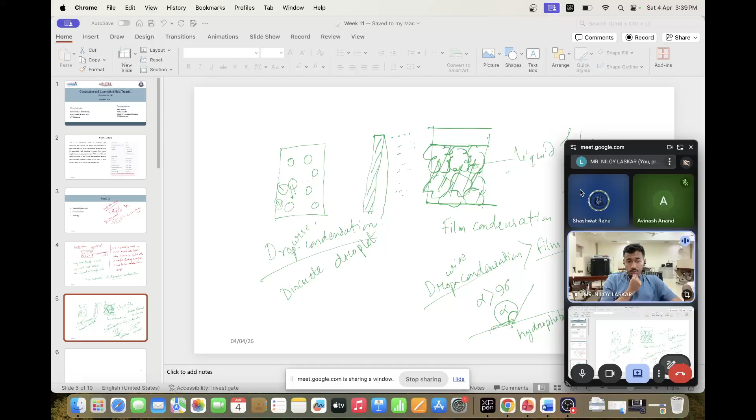So any confusion up to this? Do you understand this concept of condensation? There are two types.

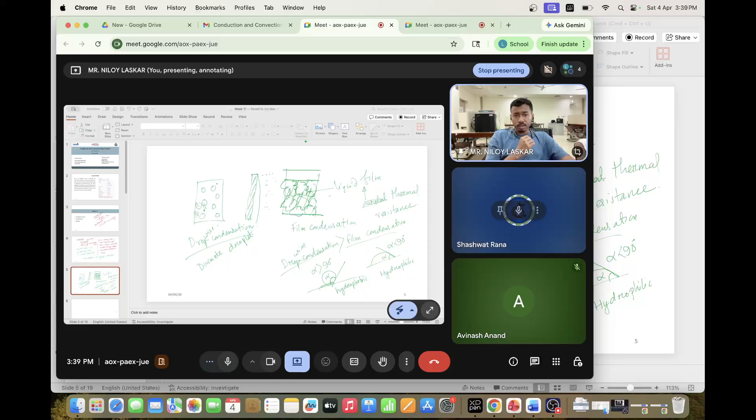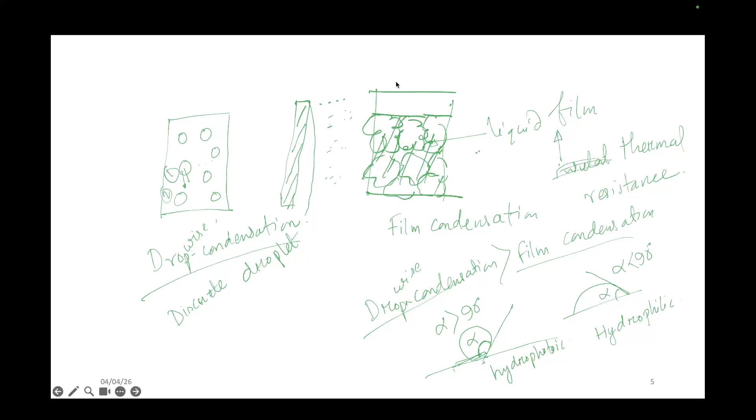If both temperatures are same, generally... let me move to this slide. If this is the rod or plate, and its temperature is 100 degree, and the temperature of the vapor is also 100 degree, then what will happen? If the vapor particles are both at 100 degree, then it is in equilibrium.

If the vapor particle is somehow at 100.1 degree, then condensation will happen. If they are the same temperature, they are in equilibrium. In practice, it is not like that if it is 99 degree then condensation is happening - at least 2 to 3 degree difference is required for most surfaces.

If I talk about boiling, when will it happen? If the surface temperature is more than 100 degree - that means if the liquid temperature is 100 degree and surface temperature is 100.1, boiling will happen. Fundamentally, this is correct, right?

Yes, we also know this. But in practice or real life, it is seen that boiling only starts if the surface temperature is around 3 or 4 degree more than the liquid temperature. Like for water, if the surface temperature is more than 103, then boiling happens.

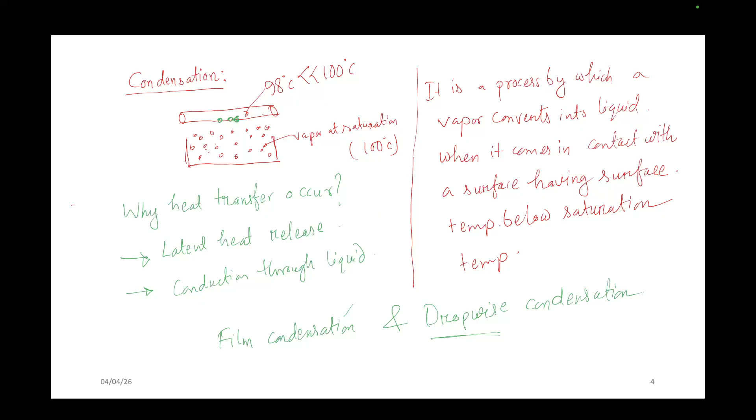Condensation, yes, yes. This concept is for condensation as well as boiling, both apply here. Now let me show you a small portion of the derivation which is necessary for your exam point of view, that's why I'm showing this.

Among these two condensation modes, one is film condensation, another is dropwise condensation. Among these, which one gives the highest mode of heat transfer? Because in dropwise condensation, the surface is more exposed to the vapor particles, right?

Say this is a plate. Initially, if the vapor is formed and there are vapor particles, this vapor gas comes in contact with this point, this point, this point - I am talking about only film condensation. This droplet, all these droplets combinedly form a liquid film. What will happen? There is also a gravity effect, so after a certain time, it will form the liquid layer or liquid film.

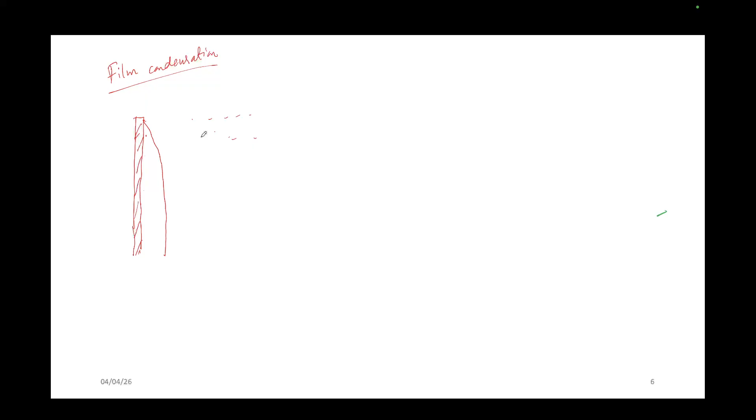So here the temperature of the vapor, say TV, should be constant, right? Any confusion?

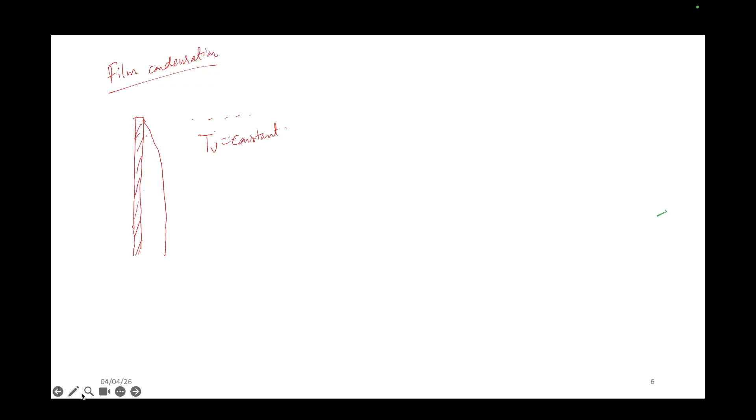Using another color - say this is your y-axis, represented in this direction, and this is your x-axis. So if I consider this plate of length L, characteristic length L, right?

And for a certain reason, this is your thickness of the - what is this? Thickness of liquid layer or thickness of liquid film. So this is a fully liquid region.

As the liquid is moving because of gravity, its velocity should be very less. But as the liquid is moving, there should be a hydrodynamic boundary layer, right or wrong? So the hydrodynamic boundary layer should be this type, whatever you have studied - it should be the same. The thermal boundary layer concept also develops here along with the hydrodynamic one.

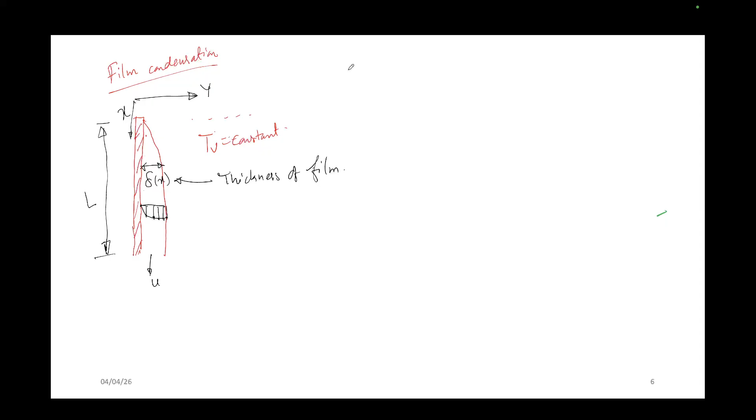And for the momentum equation, what is there? Velocity is there, velocity and pressure term. So to find out the velocity, what type of equation do we need to use? We need to use the momentum equation or Navier-Stokes equation. You can say both. So if I apply this NS equation, Navier-Stokes equation, let me write it in short form. This is rho

capital D u, sorry, capital D means total derivative. I think you forgot this thing. Let me give you a recap. Du dt means, now I think you recall this thing. So this is minus dp dx, it is only for the x direction I am talking about, plus mu.

So see here, this change in velocity in the t direction, this term, what is this? This is the total acceleration term. Already we know that there is no such term which changes, this will be 0, right?

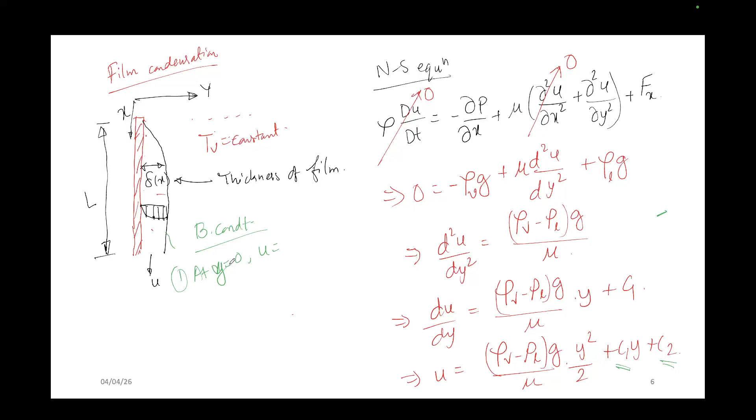No, u equal to, first at y equal to 0, not x, at y equal to 0. At y equal to 0, what is the value of u? Y equal to 0 means it is at the wall, and in the wall what is there?

No slip condition means u should be 0. So if you put that here, what will you get? This one is 0, this one is 0.

So C2 implies... C2 is 0, since u is 0.

Next boundary condition is at y equal to delta, which means the highest maximum thickness of the film. So what should be the condition at that case? The velocity gradient should be 0, since the maximum thickness is at this point.

What is the value here from the hydrodynamic boundary? We know that initially there are changes with respect to y, but after reaching the stable condition, there is no velocity gradient. So we need to put it here, right?

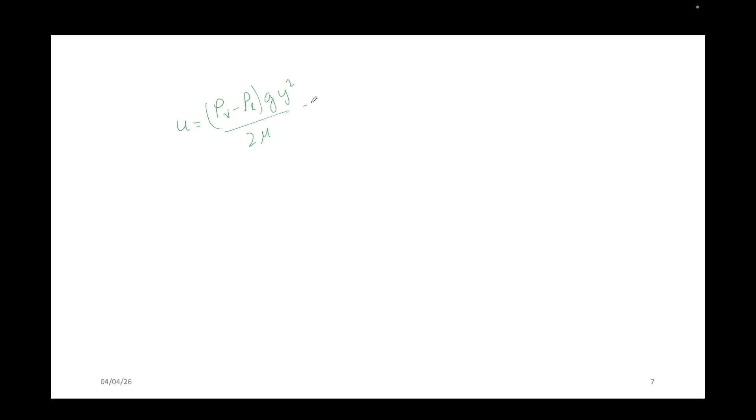This divided by mu, delta, and Y is there also, right? So if I take some constant here, to mu G Y, I can take, so what I'll get there is Y minus 2 delta, right or wrong?

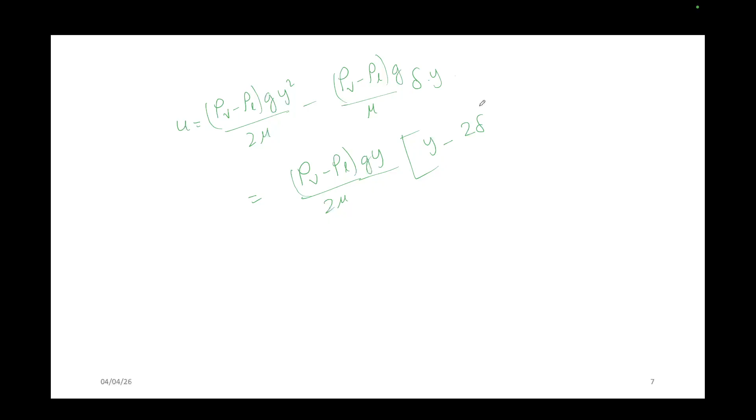So you got it, okay. Now I just want to show you one thing. If I have to find out this heat transfer or mass flow rate, say I'm taking a small area here, this is your del X. This region I'm talking about, this area. So I am drawing this thing here also. This is the small area, this is del X, this is at a here from X at this region.

So if the inlet mass flow rate is, I am using this mass conservation equation. This is the mass flow rate flowing at this, if this is a control volume. In the control volume, this mass flow rate is entering, and what is the mass flow rate here? This should be at x plus del x, right?

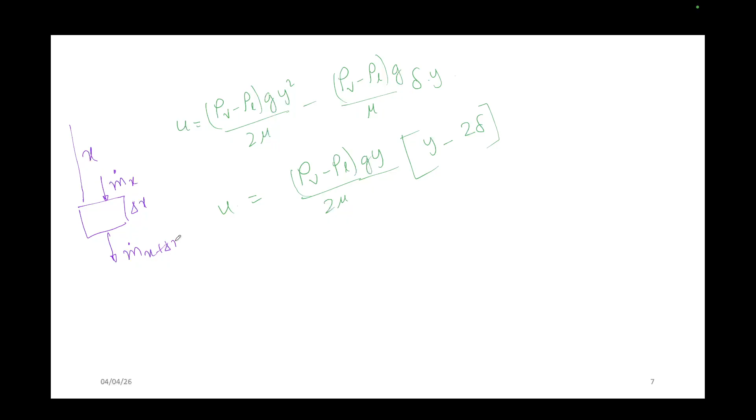And in the control volume, something may be accumulated, so I just write it as m dot c. What is m dot c? It is the energy occupied because of this condensation phenomena. Like a vapor particle once coming in contact with the cold surface, it gets converted into liquid. So there is a latent phase change, there is latent heat transfer, right? So this m dot c basically is the heat absorbed by this liquid film.

So what I can write from this, from the mass conservation equation: whatever outgoing minus incoming should be equal to, can I write? So now in the first derivative form, this thing can be written as plus d/dx of this, right? Yes or no?

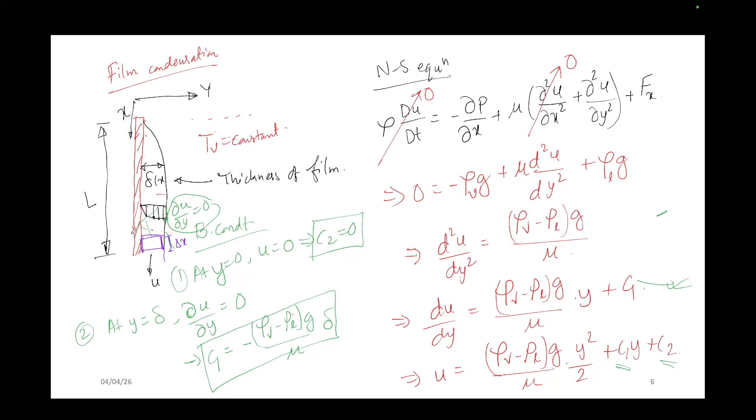This is a small section, right? In this small section, how do you find out this mass? Mass, we know, is volume into density, right or wrong? So mass basically means density into u into y. In u there is velocity into length. So I can take length into 1, because it is 2D not 3D. So if I multiply it into 1, then this whole term will count for your volume.

So what you need to do is put u here, the value of u from this equation, and after that you need to integrate. So you will get m dot x, and the integration should be from 0 to delta. Is it clear? Please let me know. After that I will move to the next concept.

Ayush and Ayush, or Shashwat?

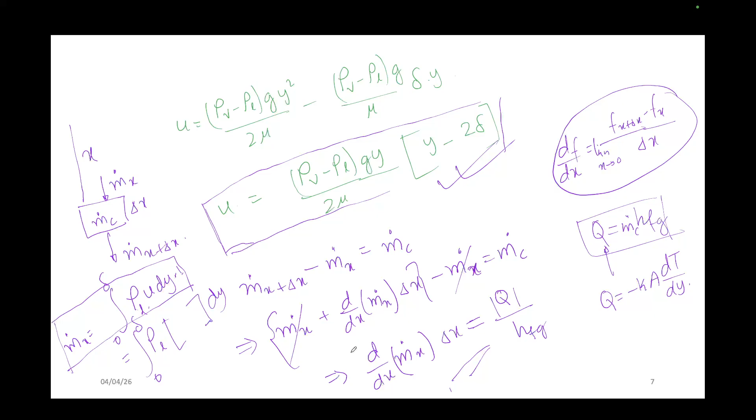So I am moving to the next concept. This is boiling. Before this, I am giving you one minute to check if you have any confusion up to this point. Think and let me know, otherwise I will start with boiling.

Okay, I am starting this concept of boiling. So what is boiling, and in condensation what happens? Basically in condensation, vapor is getting converted into liquid, right? And this happens if it comes in contact with a surface whose temperature is below the saturation temperature.

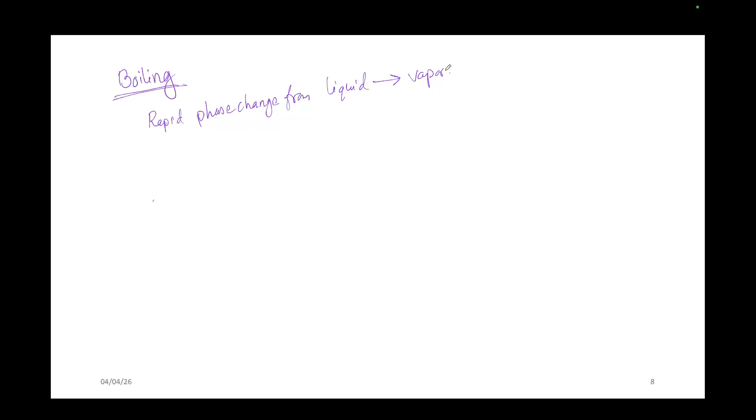So in boiling, what happens? It is a rapid conversion from liquid to vapor, if the heated surface temperature is more than the saturation temperature. So my question is, what is the basic difference between boiling and evaporation, not condensation?

Can you tell me what is the basic difference between boiling and evaporation?

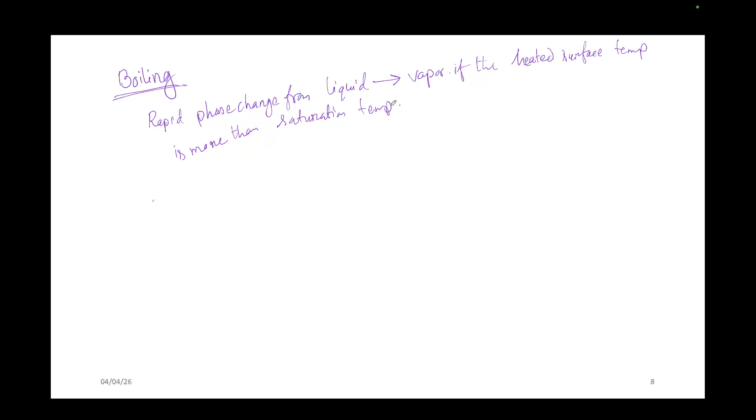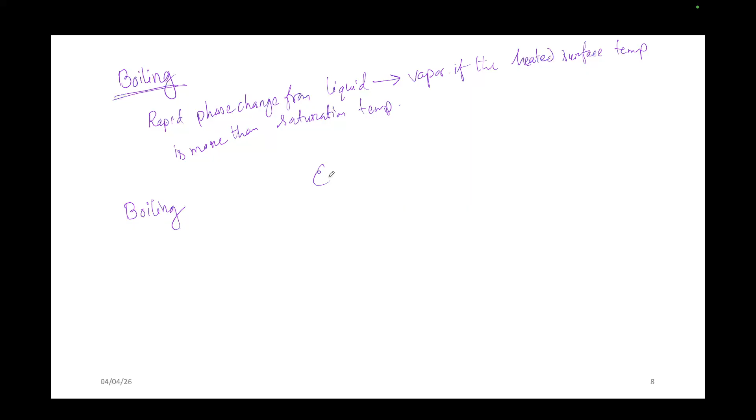Yes, very good. Any other point? Yes, I also can say this thing. Any other? Okay, good, so you've given the first point.

Next point is that boiling basically is a bulk phenomena. Bulk phenomena means it is taking place throughout the fluid domain, but in case of evaporation, it is a surface phenomena - only the top surface is taking place there. So that is the basic difference.

In evaporation, the liquid is getting converted into some vapors. In boiling also, boiling is an evaporation process. Someone may say either boiling is an evaporation process - yes, definitely it is an evaporation process. But here this evaporation is a little bit different compared to normal evaporation. How can I say that it is an evaporation? That I will discuss in the upcoming slides.

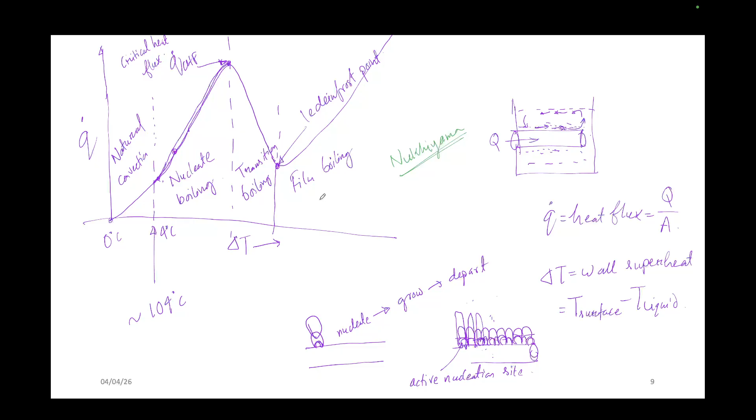This curve is basically, initially in the starting, one scientist whose name is Nukiyama performed the experiment using nichrome wire. His experimental setup is like this: a thin wire is there, and he is applying heat. So his experiment is basically power control, where he is controlling the heat flux.

In the Nukiyama experiment, what is the input parameter? Power control means heat flux control. So what is the output? Temperature difference. So he is not controlling temperature. What is he controlling? He is controlling heat flux. Now, recall heat transfer coefficient H, which you have studied. H equals Q by delta T. Remember this, though it's not required right now.

So in the Nukiyama experiment, he just started applying heat flux, increasing it this way. He gets this curve up to this point, and this is the maximum point. After this, he observed that the wire was getting... what do you think happens to this wire?

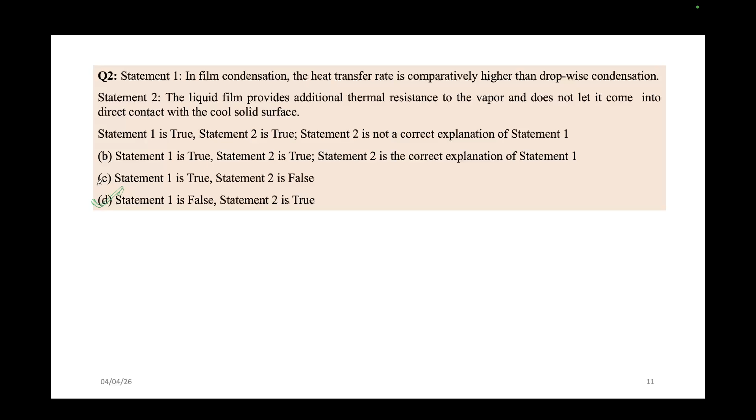Just check. Statement 2 is true, so option D. Very good. So that's why concept is important. Okay, so I'm moving to the next one.

So which of the following statements is or are true? The first is that while analyzing film condensation around a vertical cylinder, the analysis of film condensation for a vertical plate can be considered, provided the diameter of the cylinder is equal to the film thickness. Remember, the film thickness should be less than the characteristic diameter. So which option should be correct?

Statement A is false. Good. Statement B is true, because the diameter must be higher than the film thickness. Statement C is also false, so D is also false. Got it?

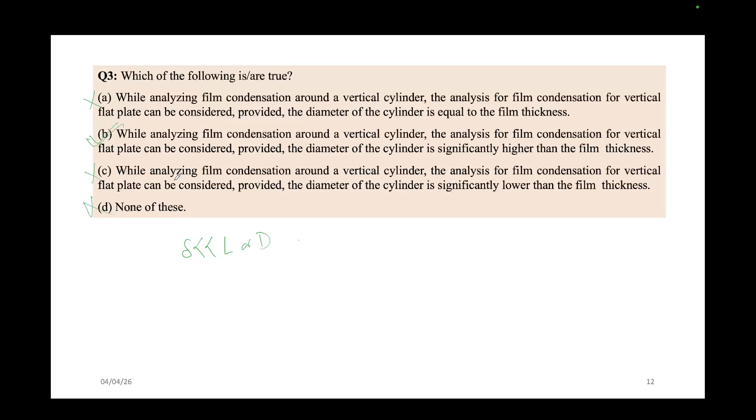So can I move to the next one? Here we go.

During boiling heat transfer, the bubble nucleation starts at the free surface of the liquid. True or false?

So next question: which of the following is or are wrong? Sorry, I just forgot to mention about pool boiling and flow boiling.

Boiling is basically of two types: one is pool, one is flow. Pool means the liquid is stable, like if you are heating water in a vessel, it is a pool because the water is stagnant, it is not moving. But if the water is flowing through a pipe and you are applying heat, then it is known as flow. Got it? That means it is stable or stagnant liquid.

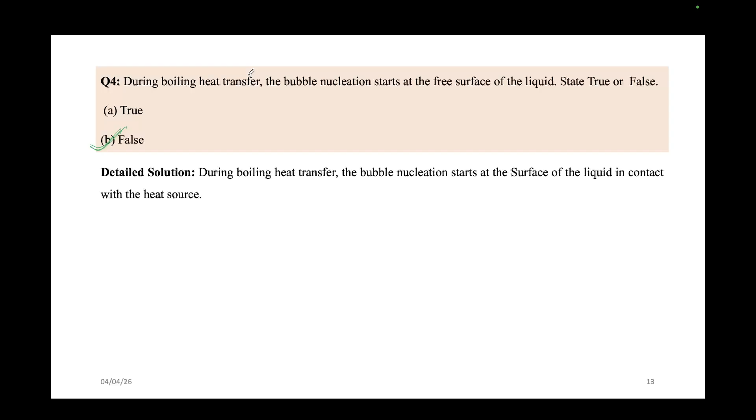See the curve. What comes first is natural convection, then nucleate boiling, then transition boiling. So the first option, is it right or wrong? It is false, so that's why it is correct here, because we want the wrong options.

Next, in case of pool boiling, as we increase temperature, first nucleate boiling starts, which gets converted into film boiling after a certain threshold. It is correct, it's true, so that's why it is not the answer here.

So does the Leidenfrost point occur before the onset of nucleate boiling? Onset means before the starting, onset means starting. So does the Leidenfrost point occur before nucleate boiling?

Do you have the curve with you? Okay, I'm just showing you this curve again. So first, what comes? The Leidenfrost point comes after the transition boiling, just before this. Got it?

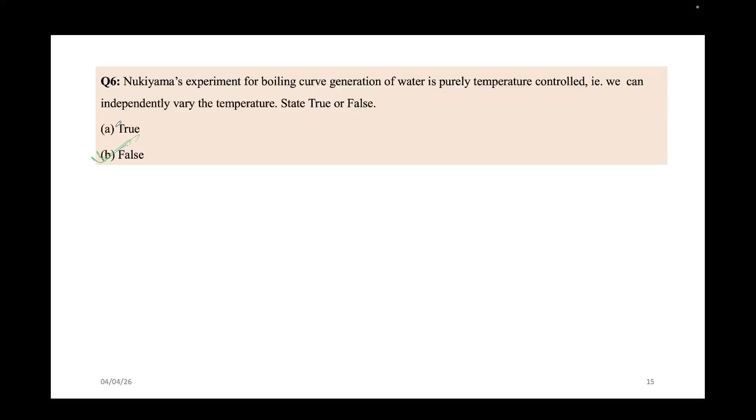And now 2 to 3 questions from the previous class. So for natural convection around a vertical flat plate, in case of high Prandtl number, the Nusselt number is proportional to the square of the Rayleigh number. Is it correct?

Nusselt number is equal to C times something to the power n. I also forgot this formula.

Hmm. Yes, just made a mistake.

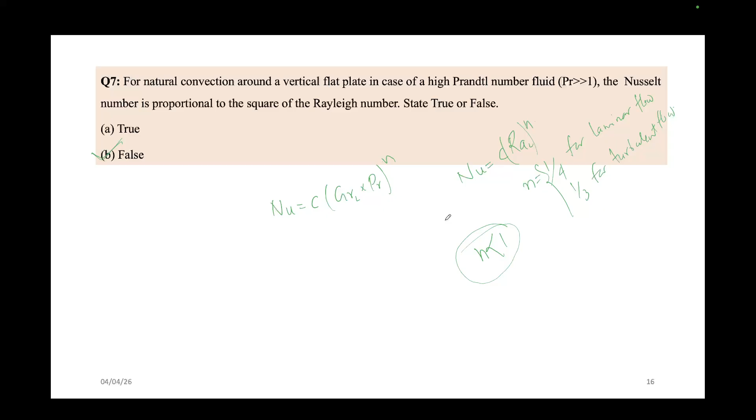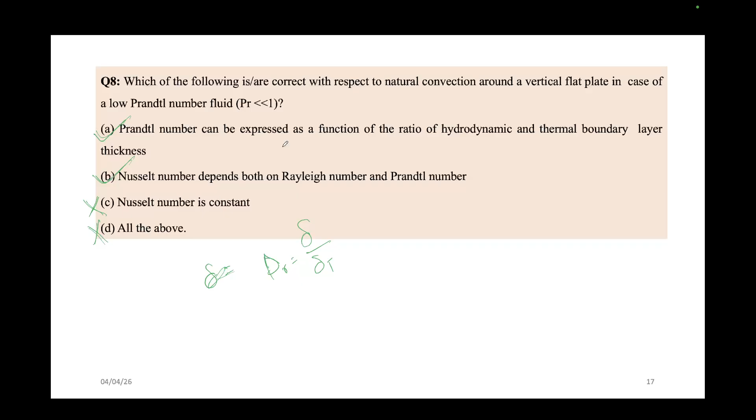So the correct option is option A or B, right? But in the end, according to me, the option should be A and B. But in the NPTEL last year, the answer they have given is only B. So I don't know why. But the correct answer is option A and B, according to me.